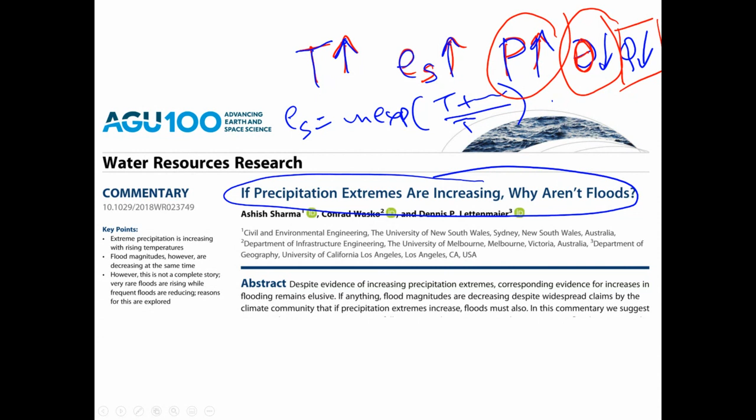At the end of the day, what we have found using actual data is that moderate floods, not the very extreme floods, but moderate flood events, are actually decreasing. While the more extreme floods, the ones that cause deaths, the ones that we use for our design applications in small urban catchments, are increasing. I'll show you how we arrive at this conclusion.

Okay, the logic is we use temperature. Temperature we know is increasing, so we make use of this assumption. Now what we do is we try to quantify the trend in any extreme, could be a flood. And the problem is that it is very unstable. This trend is almost impossible to quantify easily. So we use a trick.

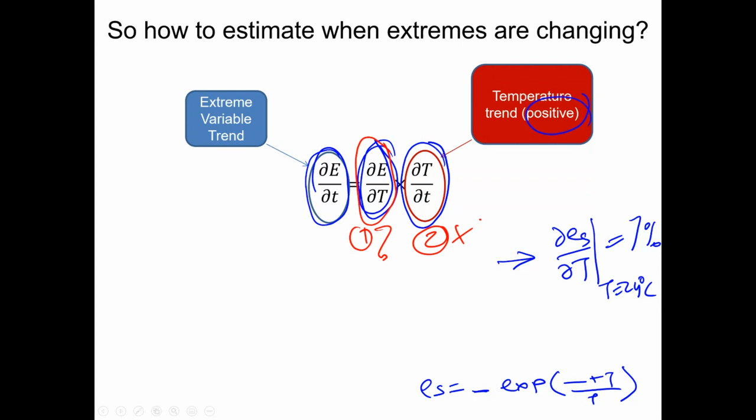The trick is that our trend can be expressed as a multiplication of two terms, term 1 and term 2. The second term is positive, and the first term we don't know. But because the second term is positive, all we have to do is estimate this first term. This first term is called the scaling, the Clausius-Clapeyron scaling, which equals 7% per degree centigrade for rainfall extremes and for saturated vapor pressure.

This is something you need to verify on your own, it's worthwhile doing. This is the reason why you have big rains around the equator and small rains around the poles, because the atmosphere cannot store that much moisture around the poles. Whereas around the equator, it can store a lot of moisture, so you can have really high intense rainfalls over there.

Coming back to floods, this particular paper used 5,000 catchments, and these catchments were all free of snow because snow is a messy animal. When temperatures increase, snow melts faster and it has complicated impacts on flooding. But this increase in flooding because of snow melt has got nothing to do with rainfall. We just wanted to focus on rainfall-driven flooding, so we excluded all snow melt originating floods and catchments.

We used 5,000 catchments and 50,000 rain gauges across the world. What did we do? We estimated these two guys, the scaling for precipitation extremes and for stream flow extremes. So what is an extreme over here? It's usually the top 6 precipitation events each year and the top 6 flow events each year. That's how we define these extremes.

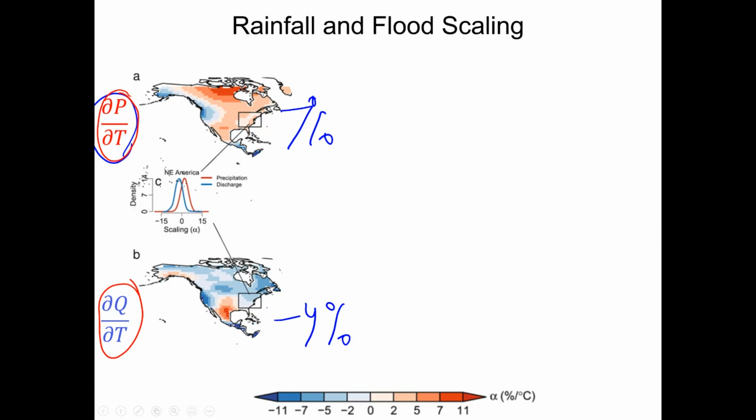Cutting a long story short, there is a general increase in precipitation and a decrease in stream flow. But remember, our events are not like a once in 100-year event, they are the 6 topmost events each year. But if you look at all of these events, lots of events, you look at what temperature was causing them, and you look at the rate of change of the precipitation extreme or the flow extreme with temperature, you find

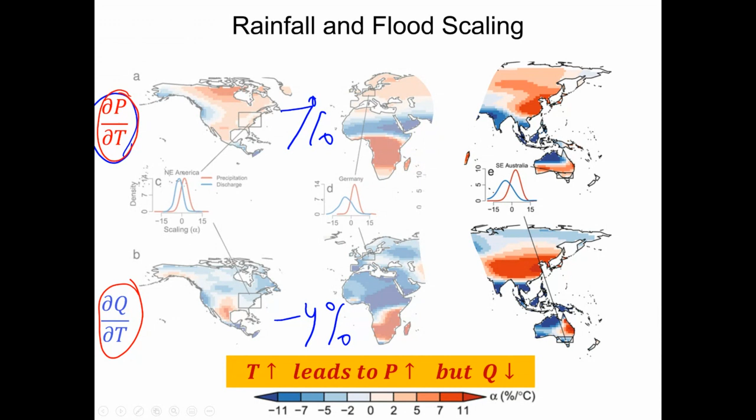this pattern that the precipitation is increasing roughly at CC, Clausius-Clapeyron, but that the floods are decreasing. Now, this is a pretty important observation, guys. You have to understand this is something that is quite scary, and I'll tell you why.

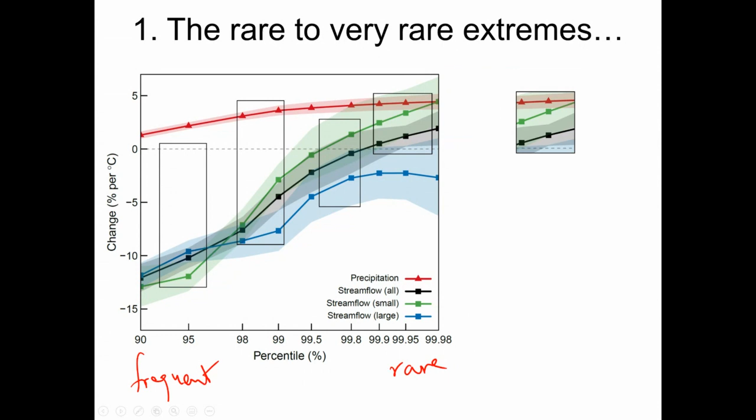If we consider only the extreme floods, remember this is rare and this is frequent. So if we consider the really extreme floods, what can be noted about them? Well, the first thing that can be noted is that the flow scaling is increasing and it is approaching the rainfall scaling of 7%.

And this is especially so for smaller catchments. Now remember, we are not considering urban catchments in this analysis, but smaller catchments behave very similar to urban catchments because in small catchments, it is the rain that creates the flood. In large catchments, the rain is important, but the flood is controlled also by the moisture in the catchment. So small catchments are very much like city catchments, where the rainfall will create a flood.

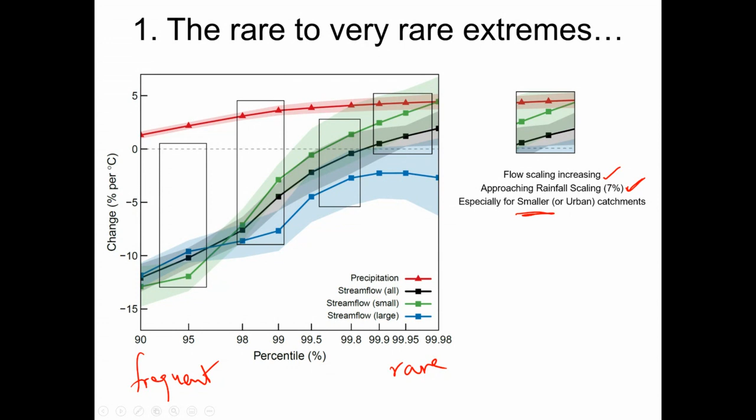Why? Well, the most obvious reason is that farming related practices are already very mechanized, and that will continue to happen. If you go to France or Israel or any developed countries with significant farming operations, it is two people in a family that control a farm having 10,000 cows. That might be acres and acres in terms of size. Everything is more and more mechanized already, and this will continue to happen. You would not need as many people in the countryside in course of time as we have now. So people will tend to congregate in cities where their infrastructure will be provided.

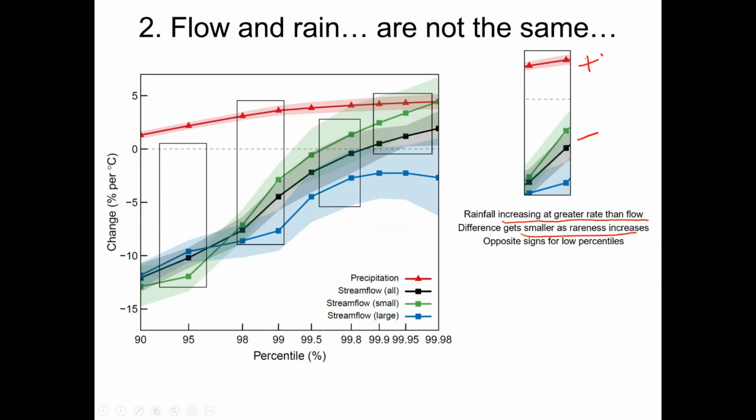So what it means is a larger rainfall peak will lead to a lower flood peak. Now these are fairly frequent events, the 98th, 99th percentile. So it's not very frequent. These are events that can cause damage in a flooding context. But what we are trying to say over here is that even if rainfall increases, you might not see an increase in the stream flow. So that is a problem because that is what we use as the basis of our flood estimation nowadays.

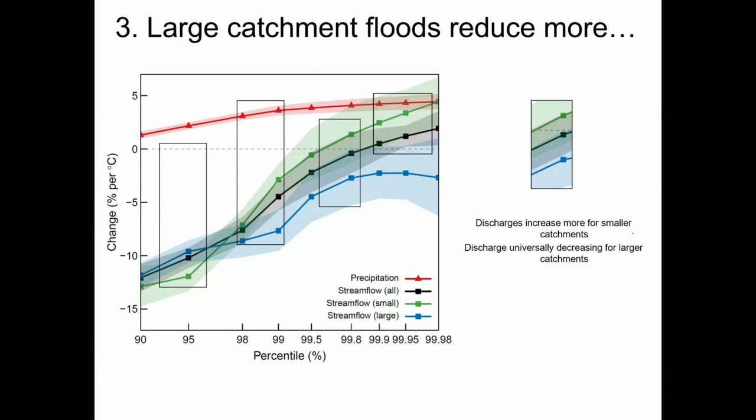The third point is fairly important. If you look at this box, you can note some very strong things. Discharges are increasing mostly for smaller catchments, and they are decreasing for the larger catchments. Now, remember, it's the same rain that is happening in small catchments and large catchments. So why are small catchments showing increased floods while large catchments are showing decreased floods? Well, the reason for that is actually quite simple.

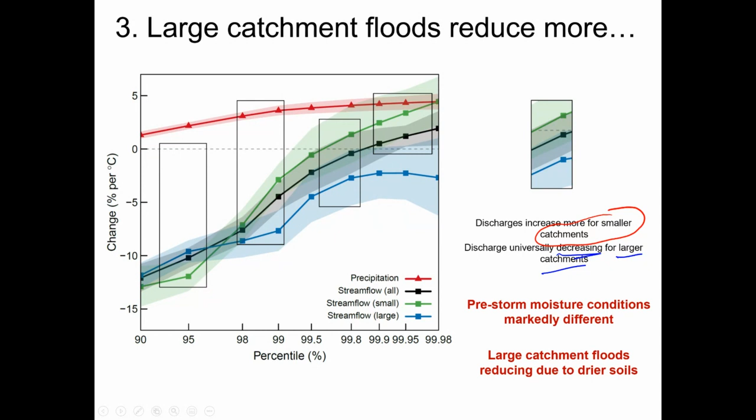Floods in small catchments are a function of rain because the catchments cannot store moisture. The volume of moisture they can store is fairly small. So the moment you have rain, that volume gets filled up and the catchment is wet. After that, any new rain basically means that it will just become flow. In a large catchment, that is not the case. The large catchments can store massive amounts of moisture. So once you have rainfall in a large catchment, because it can store such a significant amount of moisture, it takes time for that moisture to get full.

Now, unfortunately, the large catchments' moisture is now more empty because you're having greater evaporation. So the soils are getting drier faster than before. And as a result of that, the large catchments are usually showing smaller moisture. Hence, when the new rain comes along, that new rain first has to wet the soil and then it becomes a flow or a flood. As a result of that, for large catchments you are seeing a decrease, whereas for small catchments you're seeing an increase in the floods. And this is a fairly critical point.

Now, when do large catchments matter most? Large catchments matter most when it comes to water supply.

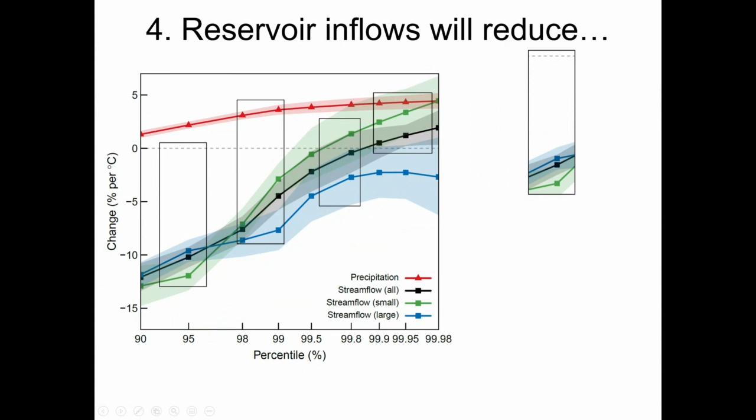Now, your reservoirs, which store the water we need in our cities to survive, can store a certain volume of water. Once you have a very extreme flood, what you do is open the spillway in the reservoir and let those floods out.

But what keeps a reservoir full every year is this frequent flood. You need a big flood in a year. If you have one reasonably big flood in a year, not a damage causing flood, just a reasonably big flood, that is enough to fill the dam, and that dam is now ready to supply water to the population for the next year. So this is fairly important. The frequent floods need to be coming because they are important for filling the dam.

The large floods are important for filling the dam, but their full volume cannot be stored. It will have to be let out, because if you try to store it, it might damage the spillway. And if the dam breaks, you have this massive volume of water going downstream. It'll kill a lot of people, have a lot of destruction. So you don't allow the dam to be full to the top with even bigger waters coming in to be stored. You just open the spillways and let them out downstream. What do you rely on? You rely on the moderate floods coming in and filling up the dam.

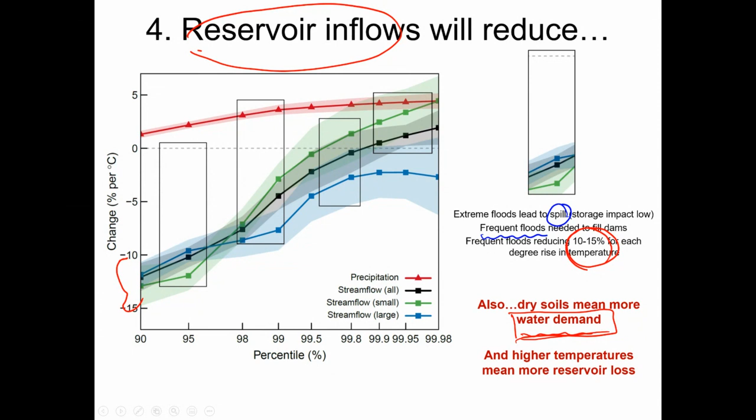Okay, now, a separate study from the United States using nearly 400 catchments said something very interesting. It calculated the annual maximum flood and the annual maximum rainfall.

And it figured out how many times the annual maximum rain creates an annual maximum flood. What is the probability of that? It found that in these 390 catchments, 36% of the time that rain will become the annual maximum flood. The remaining 64% of the time, it might be the second or third annual maximum rain, or some other rain, that creates the annual maximum flood.

Now, why is this important? The reason this is important is because this number changes to 62% when the catchments are wet, and it changes to 13% when the catchments are dry.

So this is all based on data, and this is annual maximum floods, not the top 6 floods or top 6 storms in the year that I used in that paper we showed before. So the annual maximum flood occurs from the annual maximum rain on average 36% of the time. This 36% becomes 62% if the annual maximum rain falls on a wet catchment, and it becomes 13% if it falls on a dry catchment.

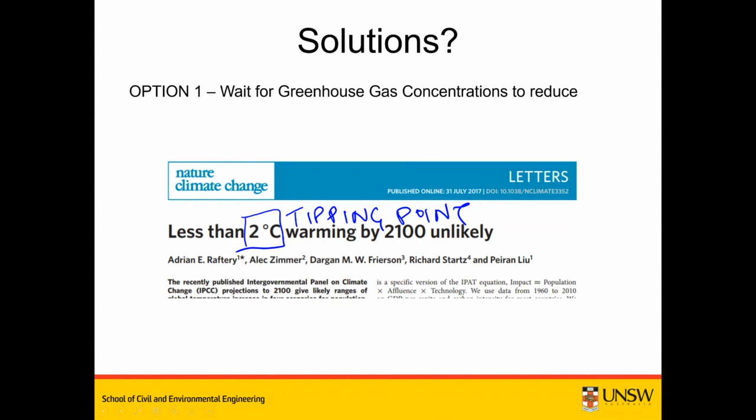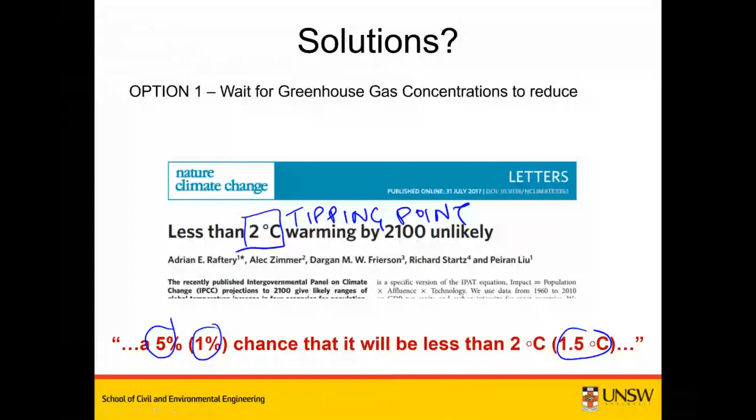The chances of containing warming below the tipping point is 5%. And the chances of keeping it below 1.5 degrees is 1%. So there's very little chance that you will be able to keep warming below the tipping point by the year 2100. Whatever you do, very little chance. So waiting for greenhouse gas concentrations to reduce is not really a wise option.

There is a second option, which is kind of what people are doing, although not officially. Each water authority is taking matters into its own hands and trying to act on this issue. So what are they doing? Well, they are looking at how they handled water insecurity before.

So in old times, when you have water insecurity like this, you have a drought. Well, what do you do? You build a dam. That is one solution that the world is looking at. Or you build a desalination plant - that's the second option. Or you try some diversion projects.

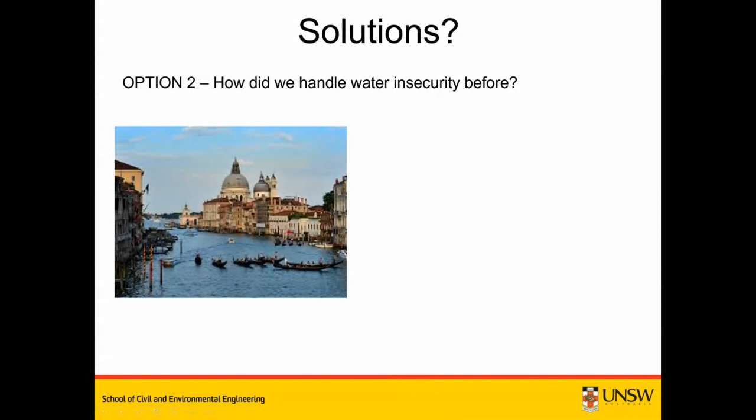Okay, the second type of water insecurity we have is flooding. This is a picture of Venice. Venice is getting flooded very often nowadays—water levels come up to this area. This is called St. Mark's Piazza, I think, and that's what you see here. But it's normally full of water, which was not the case before.

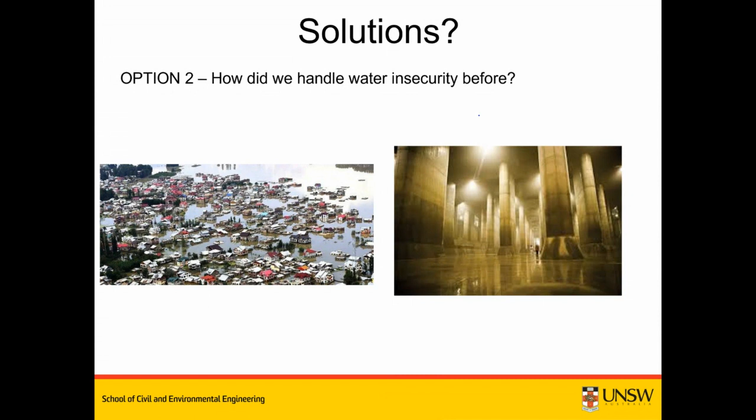One other example about flooding—another way of dealing with it is you store that flood water somehow. This example is actually from Tokyo. After the Second World War, Tokyo was rubble and they had to rebuild the entire city. But before the war, they noticed that every year Tokyo gets flooded because of tidal influx of water. So what did they do?

Under the city of Tokyo, you find these big, huge reservoirs. They fill up with water every time a big tidal influx comes in. Once the tide goes out and there's no danger, a pump switches on and transfers the water back into the river. This keeps on happening—Tokyo hasn't had floods in the last 20-30 years. Before 1945, floods used to occur every year in Tokyo.

The same type of underground reservoirs are also present mostly in very rich countries and rich cities—Zurich is an example, they have something like this. Many richer countries have invested in creating these massive underground vaults or reservoirs where water is stored, and after the reservoir fills or the flood has gone, you switch on the pump and release the water out. This is how people have addressed flooding—it's not possible everywhere, but in some places it is.

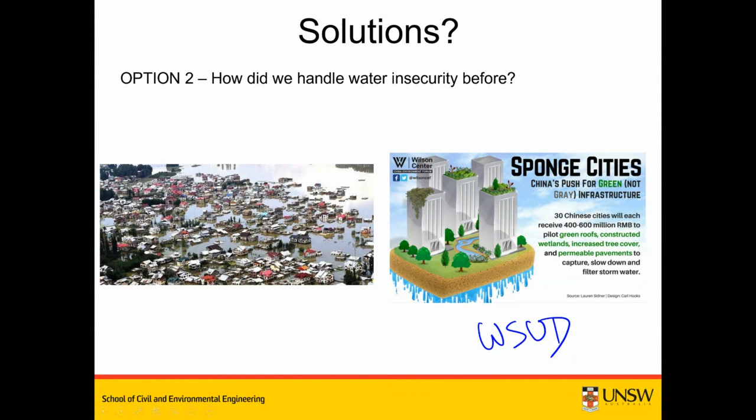So this is all part of water sensitive urban design, and this is one other option. This is not a fix to all of our flooding problems, but it is one possible thing that could be done. Now, I have a question from Danny who's asking, how do we transport this water?

So I think the transportation part, if we look at these reservoirs, or the dikes, or these diversion type structures, transportation is not by gravity - it is against gravity, and this is where the engineering challenge comes along. So you have to have some type of pumping so as to pull water up to a level from which it can go by gravity. That is how you transport the water. Pumping is needed - without pumping, you can't do it.

But the thing about the pumping is - I'll tell you another, related story. 50 years ago, our groundwater levels were pretty much the same year after year. Nowadays they have gone down by about 30 meters in the Indian subcontinent and in southern China.

Why have they gone down? There are two reasons. People need water, but they always needed water - the demand for water was always high. The second reason is very important: electricity is cheap, and electricity will get cheaper and cheaper as time goes by.

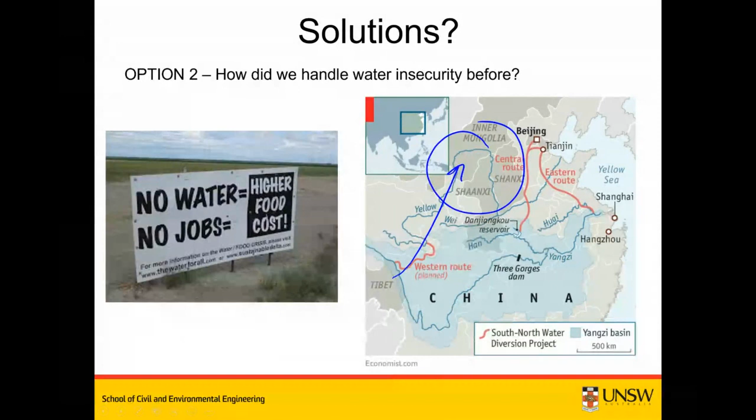So this is about water-sensitive urban design. I just have a general argument that, in addition to thinking about engineering options, it is also important to be honest about the risk, which is something we have not been till now.

Part of the reason we have not been honest is because of politics. You look at the type of information that comes from one side of the political spectrum, who will always say they don't believe in climate change, because if they start believing in it, they have to do something about it. And the doing part is what they are not comfortable about, because it involves reducing emissions. And reducing emissions means loss of jobs, changing of industries, etc. So basically their political base would not allow them to proceed down that path.

This is not just in Australia or America. In America it is very prominent and very clear, but it is literally the case everywhere in the world. Unfortunately, our political system is such that there are two sides in the political spectrum, and whenever you have two sides, they will take opposing views. One view is usually to deny that climate change occurs, and the other is to embrace that it occurs. I guess this division is too far for the common person in the middle to be convinced about the need for change, which is part of the problem.

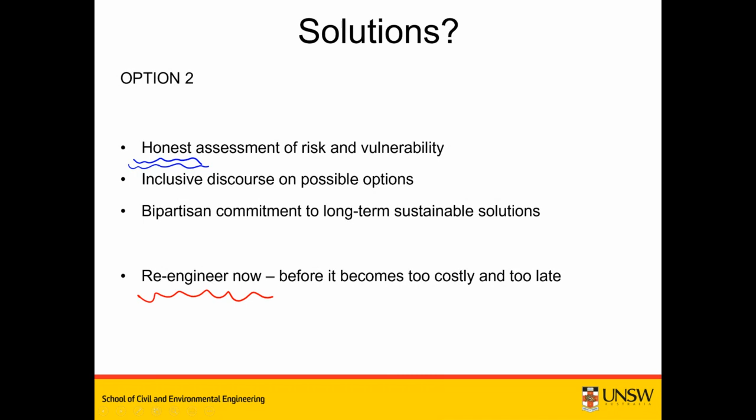Okay, so this was my presentation on the flooding stuff that I wanted to give you guys last week, but I couldn't complete.

If you have any questions on this, it might be good to jot them out now, because now we will get into the actual estimation of the design flood. The estimation of the design flood is a more engineering concept, where we will be looking at the design rainfall and how it gets converted to a design flood. So if you have any questions, think them through, put them in the chat, and I'll come back to it as we go ahead with this lecture.

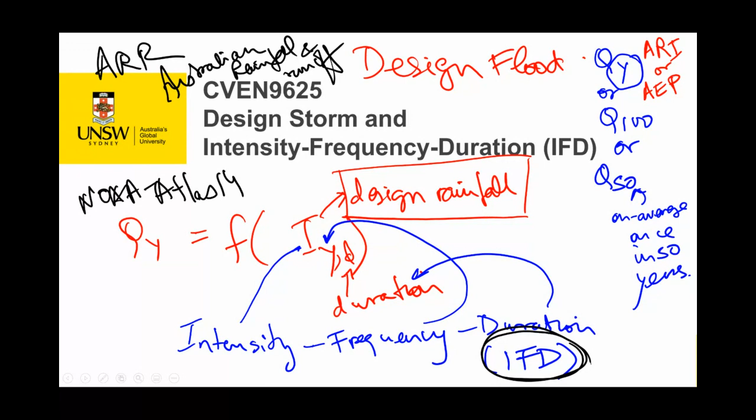We are actually having a paper come out in the next few months or so, and you'll probably hear about it, which is looking at recharge of the subsurface reservoirs across the world. Recharge is measured using a satellite called GRACE.

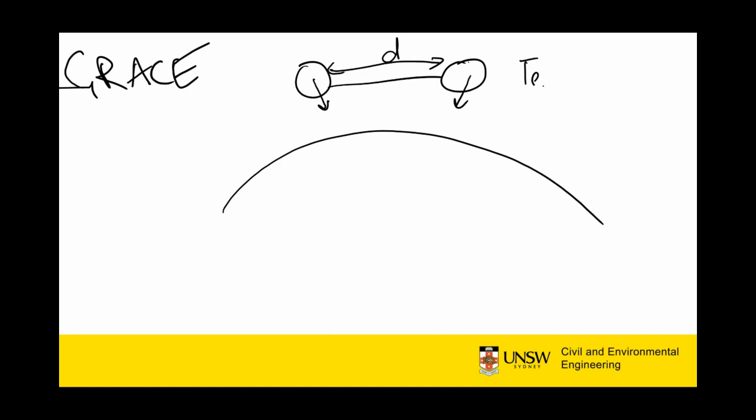This GRACE satellite is quite cool - it's actually two satellites at a certain distance that spin around above the Earth's surface. When they come above land, the gravitational pull is very different than when they come above water. So as a result, the distance between them contracts and expands depending on how much gravitational pull the Earth below exerts on them, and they are able to estimate something called the terrestrial water storage or recharge.

So essentially, there are much bigger issues than just the increase in floods or reduction in water supply that I've talked about. The issue of climate change has implications in ways that we don't really know till now. We are still guessing - only once it happens will we really understand and appreciate the extent of the damage that has been caused.

I mentioned that design flood estimation is Q_Y, okay? And this Y thing is called the ARI or AEP. ARI stands for the average recurrence interval, okay, example 100 years. AEP stands for the annual exceedance probability, okay.

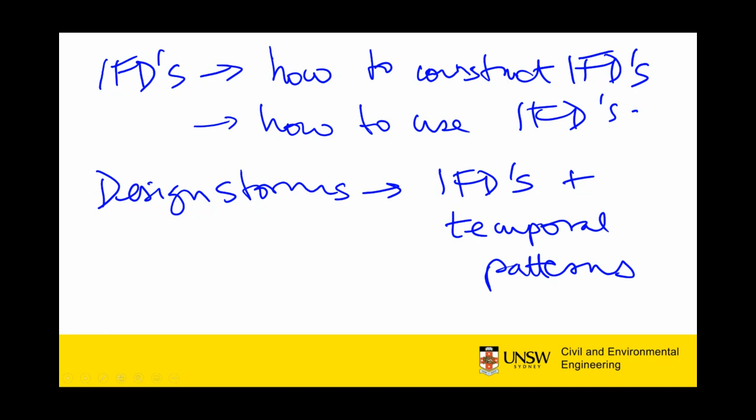But that design storm intensity is a constant for your duration. If your duration is, say, 10 hours, it'll be one constant value of rainfall for all 10 hours. That doesn't quite make sense - that's not how rainfall occurs. So a temporal pattern gives it a temporal structure. It changes the rainfall in the first hour, second hour, third hour, etc., all the way across to the 10 hours, such that the average intensity is the same as the design intensity for a 10-hour duration that you started off with. So these are the two things that we are covering in the remaining slides.

Okay, so these are developed by the Australian Bureau of Meteorology, and their most recent edition is ARR 2016. Remember, ARR stands for the Australian Rainfall and Runoff.

This Australian Rainfall and Runoff has basically been developed 4 times. This is the 4th edition of Australian Rainfall Runoff that we have. The first 3 editions were paper-based. There were lots of big maps and documents that had to be kept in all engineering consulting offices that would follow the procedures. Nowadays, it is actually available over the internet, and it's a very good document. It's a very well written and well designed document.

Because it has incorporated the best advice from academia, from government, and from the consulting industry. There are people from all branches of the profession that have contributed, and this is the first version that explicitly provides guidance about climate change impacts. I mean, this is the first national design guideline document anywhere in the world that provides guidance about climate change impacts, which is a really cool thing, which is a very politically scary thing to do, but still the document is brave enough to provide some type of advice about the climate change impacts.

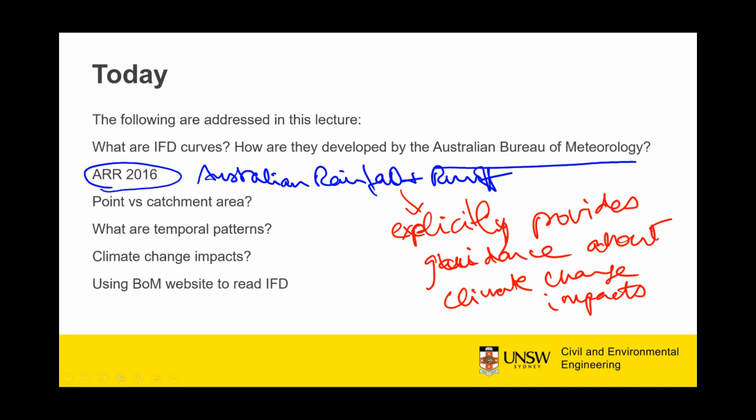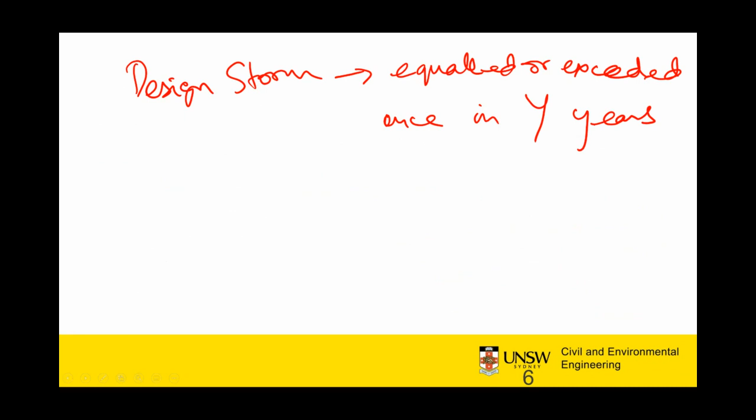Okay. So I've already mentioned what is a design storm. A design storm is basically something that is equaled or exceeded once in Y years. In the case of rainfall for a given duration D.

So it's not a real storm. This is something that is important to understand. It is not a real storm. It is a hypothetical storm, but that storm on average can be expected to be equal or exceeded once in Y years. And for the case of rainfall, the storm needs to be specified for a duration. For the case of floods, duration is unimportant - you're just looking at the biggest flood. But for the case of rainfall, the duration is important. So basically, a design storm is specific to a given duration as well as a given risk.

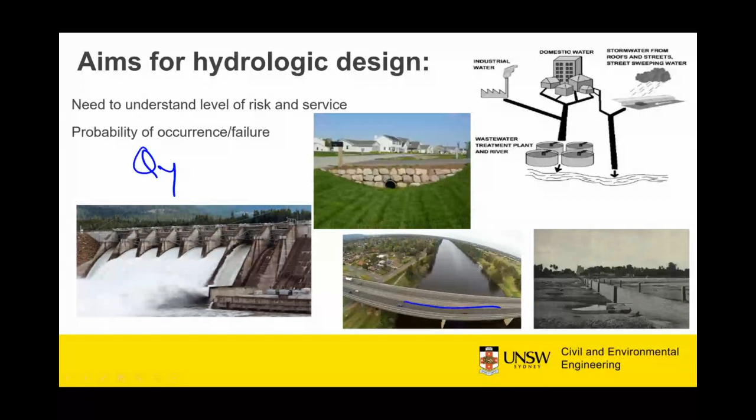So basically, using this design storm, we estimate QY, okay, which is our design flood. And this QY is the basis for finding out the height of this bridge, the size of these canals or solid structures, the length of the spillway, the carrying capacity of the spillway, and this is the most normal use, which is simply the pipe that is just releasing storm water into an open area. So stored storm water, if it has to be released into a floodway or a river or wherever you have to go, the size of this pipe is something that you would design based on design flood estimation.

What will happen if the pipe has a smaller diameter than it should have? Well, what will happen is you'll have flooding on this side. These houses will get flooded - you don't want that. So you have to have the pipe of the right diameter. Somebody might say, hey, why don't we just increase the pipe to twice the diameter? That is possible, but it can be very costly if especially your pipe has to run for significant lengths over that countryside. So basically finding the right pipe diameter that is not too costly, not creating excessive risk is important, and that is all coming from this design flood estimation procedure.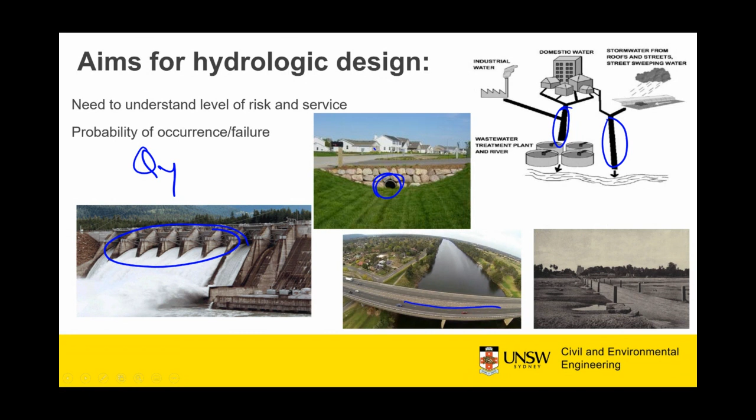This is how you understand the design flood estimation idea. This is a river you're seeing, with flood banks, and this is the normal width of the river. You will see some dry patches that are very wet, where the soil color is usually different. That will be the typical extent of a 2-year flood.

Vegetation will normally start growing after the 50-year flood line. This depends from place to place and on the type of vegetation as well, but typically, when you have a watermark until which there is no vegetation, that watermark will be less than 50 years. After 50 years, you'll start having permanent vegetation in that area.

So this is what we are talking about. We are saying that in certain cases, if you're putting a bridge across this particular point, that bridge needs to be anchored far enough such that it can withstand a 100-year flood. That is what we are trying to do. We are trying to estimate the 100-year flood so as to find the plinth level of the bridge, and how do we design its columns, etc., such that the bridge is not impacted by flooding.

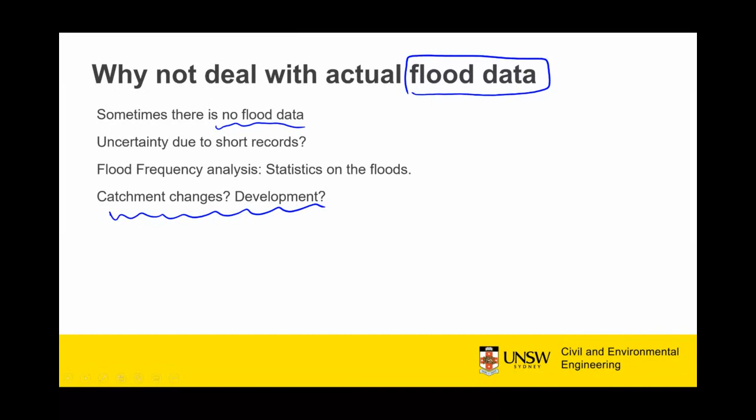Sometimes the catchment has changed or the climate has changed. Like in the case of Sydney - if you look at the oldest pictures of Sydney, looking up from the harbor towards what is now Central Station, you can search it up. You will come across a building called Cleveland House, which is on Cleveland Street, not too far from Central Station. This Cleveland House was the only building you could see in the really old pictures of Sydney. And this is bang next to Central Station. It is not even visible now - it is surrounded by skyscrapers all over the place.

So basically, urban development has changed everything. The design flood that should have been used to construct, say, the stormwater structures around Cleveland House are completely invalid now compared to what they were before. It's all because of urban development. This urban development is a part of life, and the second thing is climate change. We have just discussed that urban floods are likely to increase because of climate change. So essentially, flood data alone is not sufficient.

What do you do in such a case? You use rainfall, or IFDs. Luckily we have lots of rainfall data because flood data is a bit of a pain to measure. I mentioned in the lecture, last week or the week before, that measuring floods involves taking the cross section, cutting it into sections, estimating velocity, and then figuring out the overall discharge. It is not simple - it takes effort, it's costly. Rainfall is very easy to measure, so we normally use rainfall.

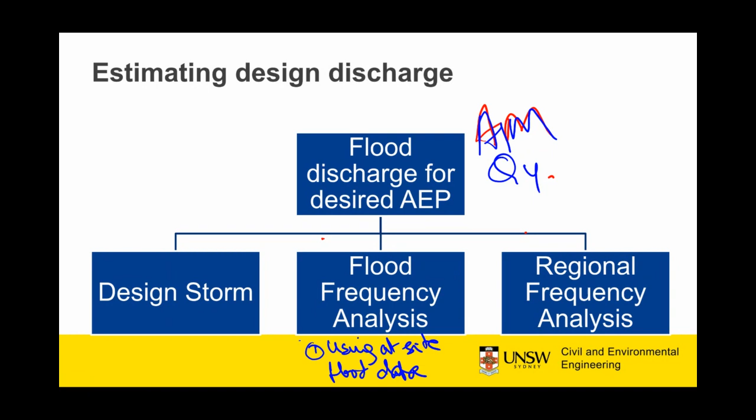So our aim is to estimate QY—that is our aim. QY can be estimated directly from flood data. So option 1: using at-site flood data, you use something called flood frequency analysis. That means you have a catchment—let me just make up a catchment. This is your river.

Okay, you're trying to build a parking lot over here. You need an estimate, and you have been measuring floods for some reason. If you have measurements, you would use flood frequency analysis - that is the ideal approach. If we have flood data, use flood data in most situations. Unfortunately, flood data is rarely available where you're trying to build your parking lot or a new city, so you often can't use it. You would like to use it, but it's very difficult.

So then the second option comes along: use flood data from nearby catchments. This is what regional flood frequency analysis is. Now, regional flood frequency analysis is not about blindly using flood data from anywhere in that region - you have to take into account the difference in catchment areas. You have to convert for the same catchment area, the same slope, the same intensities, etc. There is a bit of uncertainty involved in that whole process, and that is called RFFA. This one is called FFA, flood frequency analysis. So both of them are using flood data.

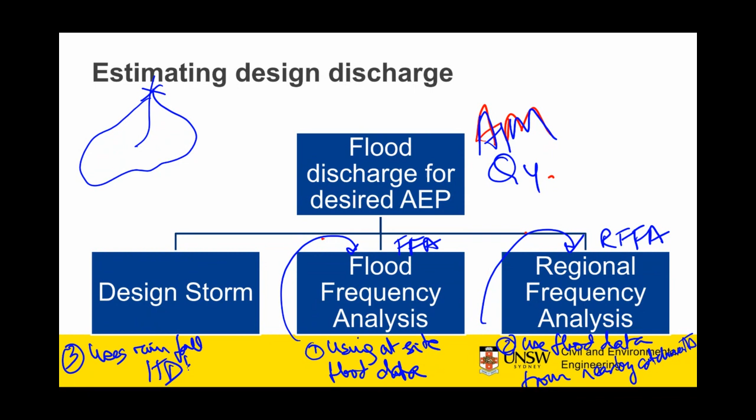Give me a second, guys. Okay, still working. Good.

So the third option is using rainfall IFDs plus a model. What is the model? It's a hydrologic model. So basically, you use a hydrologic model and a rainfall IFD to give you a design storm. That is typically what you would use in an urban setting, or in a place where you've had development, or where you have no flood data.

So Jonah has a question about clarifying what is the meaning of a 100-year flood. A 100-year flood means that the rainfall, say a 100-year rainfall, can be equaled or exceeded once in 100 years. That is what it means. It doesn't mean that the rainfall occurs once in 100 years - it can be equaled or exceeded once in 100 years. So basically, a 100-year rainfall is a very rare rainfall.

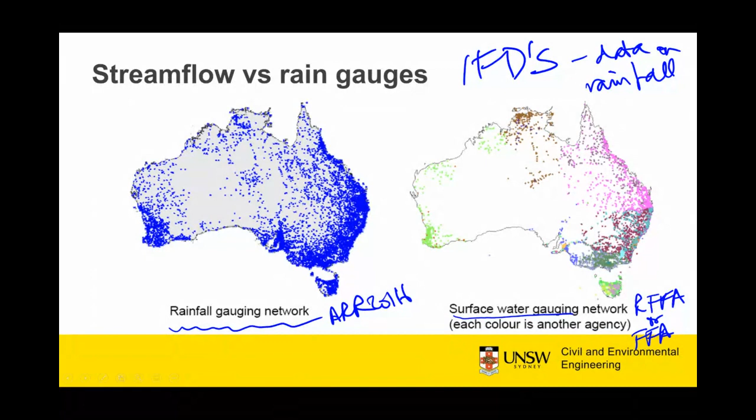Well, the data comes from our rain gauge network. This is the Australian gauging network that has been used in ARR 2016. And this is actually a streamflow network, which is being used in RFFA or flood frequency analysis. So this is what has formed the basis of our streamflow estimation, design flood estimation in Australia. And the rainfall information here is what is used for giving you the IFD relationships for each latitude, longitude in Australia.

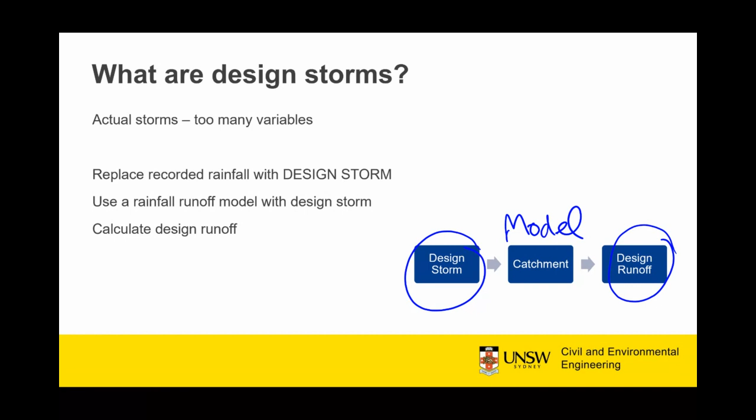So how do we go about doing it? Well, a design storm is what we have discussed - it's a hypothetical storm. You use this as the input into a model that represents your catchment, and then the output is called a design flood hydrograph. Okay, so if you think about it, it will increase to something like this, and then this value is your design flood.

What is the design storm? The design storm will be something like this, until a duration D - so this is a D duration design storm. This design storm is used as an input into a model and finally gives you a hydrograph. This hydrograph is a plot of flow versus time, and its peak value, its highest value, will be the corresponding design flood. So if this storm is your 100-year storm, then the peak value will be Q100 - that is the whole idea. Don't worry, I'll come back to this again. These are tricky concepts, and I understand they might be creating a little confusion.

So what is this design storm approach all about? Well, at the end of the day, we need QY - that's what we are after. We are after a design flood. So what do we do? We need to have our design storm.

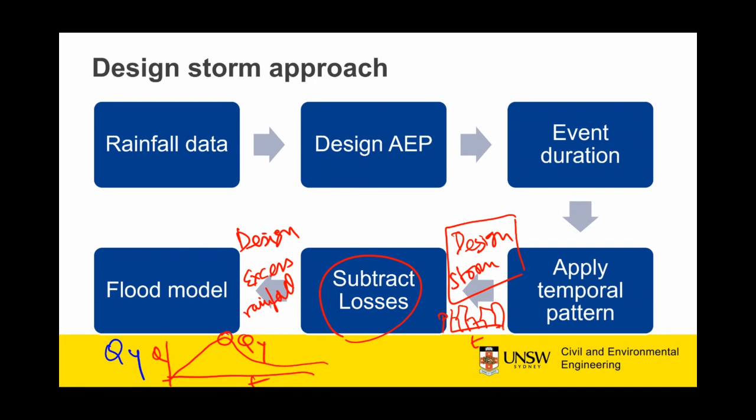That is the idea. Now, how do you get this design storm? And what does this design storm look like? Well, the design storm will look like this. It won't be a constant value. It will look like this with P on the y-axis and T over here. And the length of time over here will be D, which is your duration.

So how do we get to this level? Well, what we do is from our rainfall data, which is our IFD, we first decide the probability. Is it a 100-year flood? What is the Y over here?

Then we decide the duration D. Do we need a 10-hour duration storm or a 3-hour duration storm? And there is a very good basis for selecting the length of the storm, the duration of the storm. I'll come to that later.

So now, once you have all of this, then you have YID. That is how it is written. YID, which is the design intensity, which is I, intensity for an AEP or ARI of Y and a duration of D. So this value might be, say, 60 millimeters per hour. That is your design intensity.

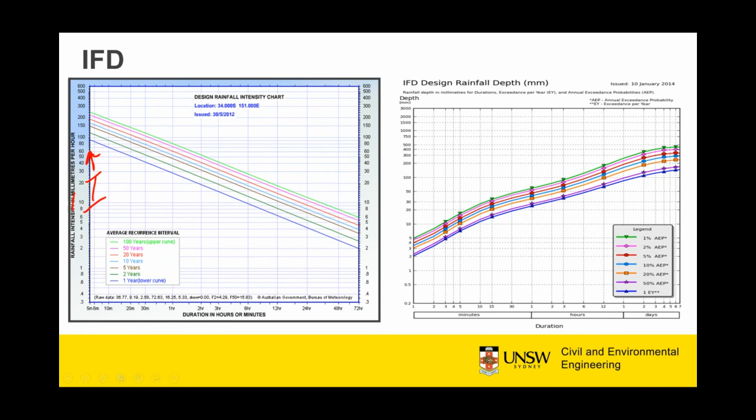So look at the y-axis. This y-axis is I. Yeah, difficult for me to write like this, but this is I, okay, this is going up. That's on the y-axis. What do we have on the x-axis? That's duration D. What do we have here?

These lines that you're having are Y or 1 upon Y. So when I say Y or 1 upon Y, I mean like 100-year storm, and 1 upon Y, 1 upon 100 is like a 1% AEP. These are two interchangeable terms. If you know one, you automatically know the other. So basically, you're having these different lines that designate whether it's a 100-year recurrence or a 1-year recurrence interval.

Okay, now suppose you're interested in intensity for, say, 12 hours. So you go up 12 hours. Now, you know your structure is a very risk-averse structure, and you need to design with a probability of failure of 1 in 50. So you basically look for a 50-year ARI, which is this guy. And then you stretch it across. That's your intensity. So this is essentially 50 I 12.

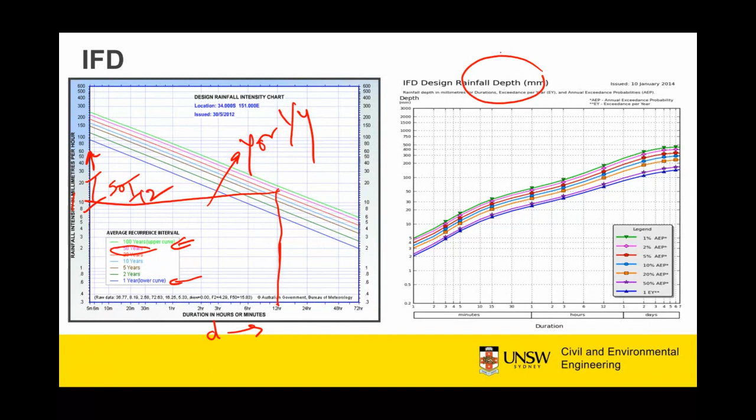The same plot can also be plotted in terms of depth. So this is millimeters per hour, and this one is just millimeters. What they have done is integrate the lines on the left-hand side to get the depth, because many times what people need is the depth. This is exactly the same two terms - the right-hand side is just an integral, converting the left-hand side plot into depth units.

Where do you get them? Well, you get them from a website, and I'll show you the website. I have it over here.

This is the website - look at the website address: bom.gov.au/water/design rainfalls, blah, blah, blah. This is giving you the 2016 design rainfalls from ARR.

In order to estimate them, you can estimate it for a single point by providing the latitude or longitude, or probably the easier thing to do is just look at a map. It's having some problem in terms of the map interface, but typically you can really specify on the map - you don't have to know the latitude and longitude.

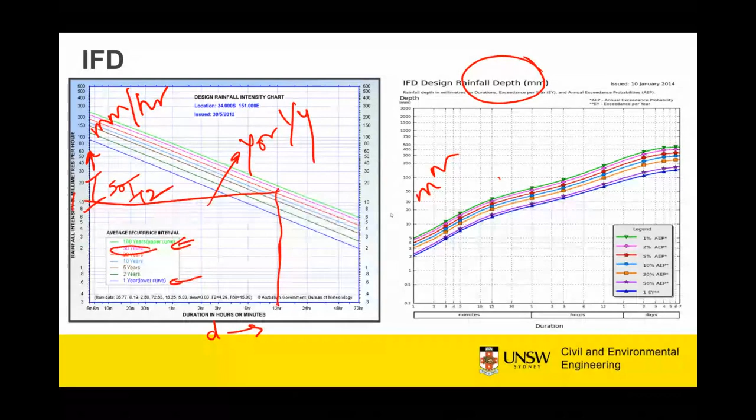So that is basically what your IFD system looks like, and that is what you have to use in your problems, because you'll be having a second assignment trying to estimate the floods, and you'll be having tutorial problems using this IFD website as the basis of estimating the flood values.

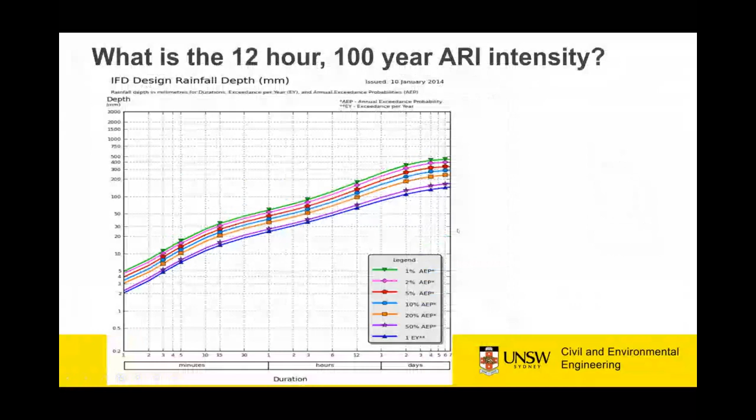I'm going to skip all of this - I've already told you what it is. I told you about these Australian Rainfall and Runoff documents that were developed before in paper terms, but the most recent version is available over the internet as a document, and this is a very powerful document. It has a lot of good guidelines as to how you should estimate a design flood in different situations.

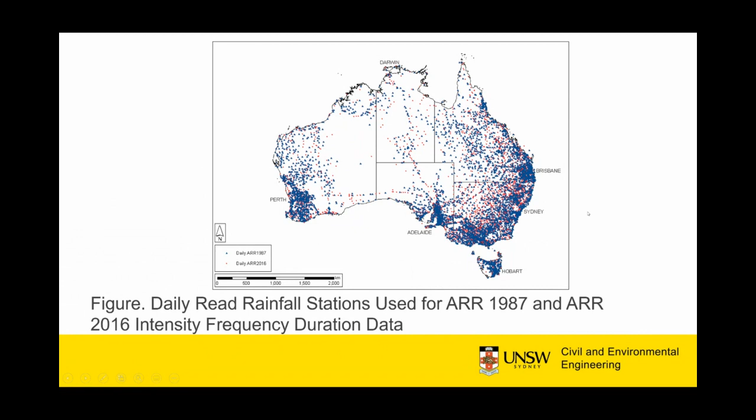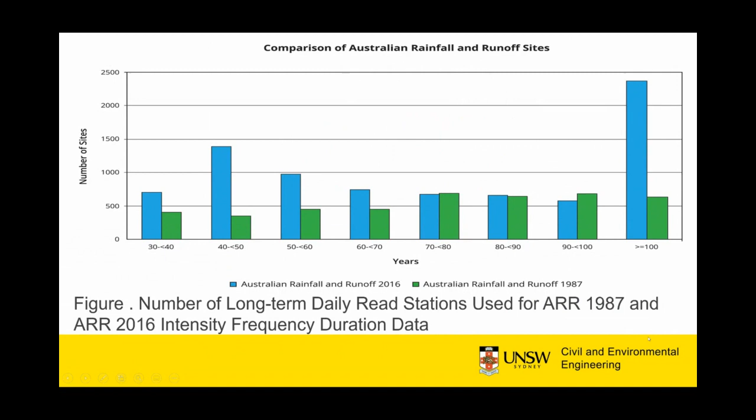If we skip the history, what has been used to estimate the IFDs is this information - the network of rain gauge stations. These rain gauge stations were used before in the previous version of ARR, but nowadays we have increased it very significantly. The number of long-term stations has increased fairly significantly for the case of the 2016 ARR, and the more data you have, the better way of being able to estimate the IFD.

Now, I've told you where to get the IFD information from. I think what is more important is to understand, especially in a graduate course, how these IFDs are specified in the first place. So basically, if you take a time series - in this case it could be the rainfall time series with time - these could be the time series, measured at a single gauge.

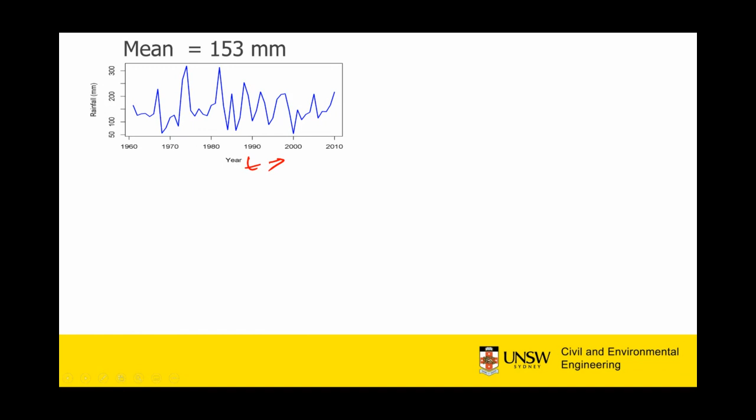The idea is that you can just take the annual maximum values of this time series. Once you take these annual maximum values and express them in probability terms, the highest value is the one with the lowest probability of being exceeded, while the lowest value is the most likely. Then you have a relationship of the annual maximum rainfall against probability.

What you can then do is fit a probability model, and then from this probability model you will be estimating some parameters. Finally, you can use the model to extrapolate or interpolate.

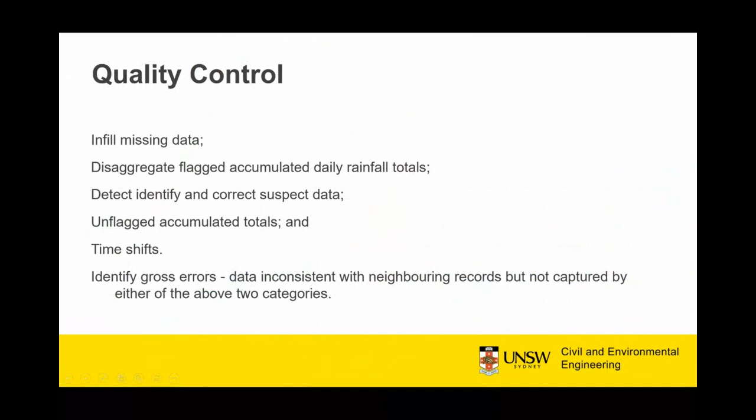So how do we estimate this probability model? We have certain procedures for estimating design rainfalls up to infrequent events, which are dealt with through the IFD curves.

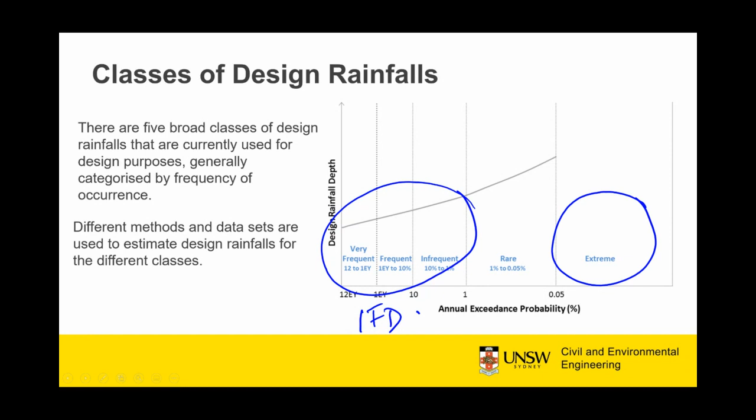When you look at really extreme events, like those needed to design a flood spillway, you look at something called Probable Maximum Precipitation, or PMP procedure. There's a different design procedure for the most common IFD problems we're interested in - these are typically for urban stormwater modeling. For urban stormwater problems, we use the Bureau IFD procedure. But for very infrequent, rare, and extreme events, a separate procedure is used called the Probable Maximum Precipitation procedure, which I will discuss later.

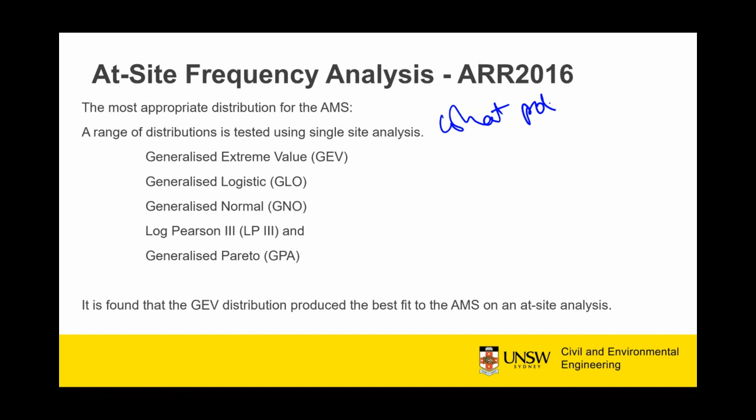So what probability model do we use? There are certain probability models that have been developed by hydrologists across the world. The one used in Australia is called the Generalized Extreme Value, or GEV probability model. I won't get into details, but for practical purposes, this is a probability distribution.

This probability distribution has been mathematically derived because it is very well suited to characterize maximum events - maximum events because we are looking at the annual maximum rainfall, or the annual maximum flood. Your flood is a regular random variable, but when you consider the highest of these floods, that is a different type of random variable that is better characterized by a GEV distribution.

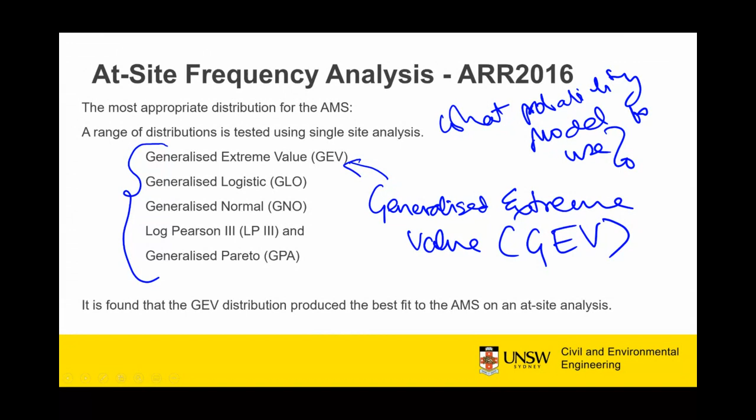You would have used probability distributions like the normal or Gaussian distribution for constructing confidence limits or performing hypothesis tests in regression modeling - that's used for normal, regular type variables. When you're looking at an extreme variable, a maximum of a lot of variables, special distributions are used. In Australia, they use the GEV model as the basis for fitting flood and intensity-frequency-duration probability models. I will discuss this later, but flood frequency analysis requires estimating parameters.

Okay, so these parameters of the probability models can be estimated in a number of different ways. The most common way adopted nowadays, especially for flood frequency analysis, is to use something called the L-moment approach. I won't get into details, but this is a way of estimating parameters.

So basically, estimating parameters is like trying a bunch of different parameters out and seeing what the fitted flood frequency curve looks like. If I use really bad parameters, my flood curve might be over here - I know this is a bad curve. Or my flood curve might be over here - I know this is bad because my actual data is sitting over here. So you keep iterating different parameter values until you get a very good line of best fit.

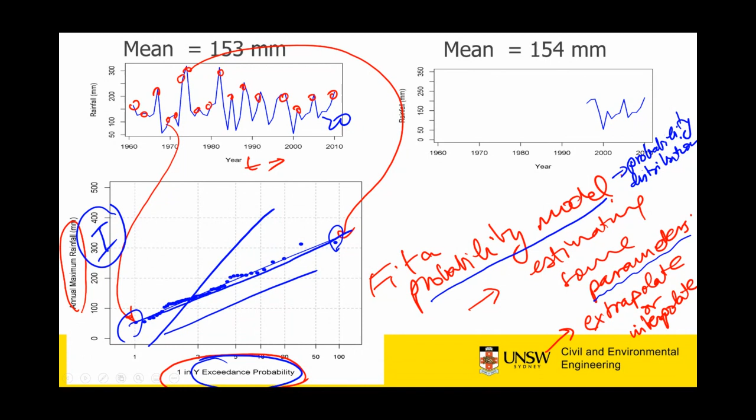The method used for that, especially for floods, is called L-moment analysis. I will skip the ARR87 procedure because that is out of date now, and we are now using ARR2016. This is only here for reference - you can have a look at your notes and PowerPoints. In ARR87, the probability distribution was different - it was a log normal or log Pearson type 3 distribution. Now we are using a GEV distribution, so I'll skip the stuff on ARR87.

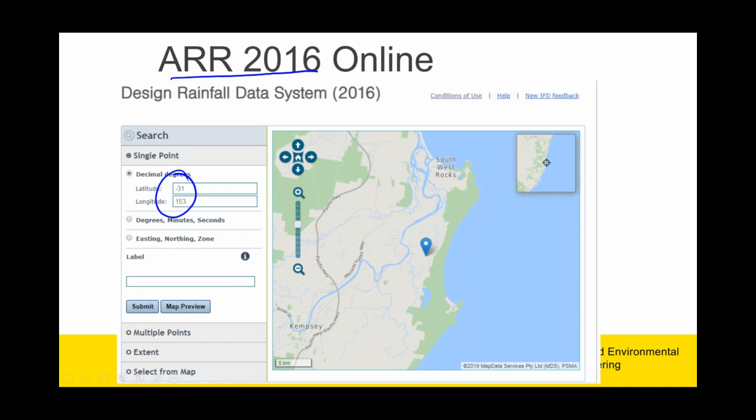But for ARR2016, I showed you the website, and essentially what you have to do is - if I had my browser set up properly, you would have seen a map over here. From the map, you can either click at a point or specify its latitude and longitude. When you do this, you get as an output either a table, which is duration running down, AEP running across, and units of millimeters meaning depth - design rainfall depth. So this is basically the output that comes from the system.

If you are interested in very frequent rainfalls, you tick a button over here, and then you're having sub-1 year ARI rainfall. So what is this? This is 12 events per year, 1 event per year, 4 events per year. This type of information, 12 events per year, might be needed to design, say, a rainwater tank or a roof drainage structure - not for a flood event, but for a small rainwater tank or roof drainage structure.

That is now becoming increasingly part of our livelihood. Remember your evaporation calculations that we discussed last week - we were talking about the frequency of irrigation. So maybe that frequency of irrigation is linked to these type of estimates. You can gauge what is the typical weekly highest intensity you might have in, say, an irrigation system, and that might allow you to set up your crop planting patterns, etc.

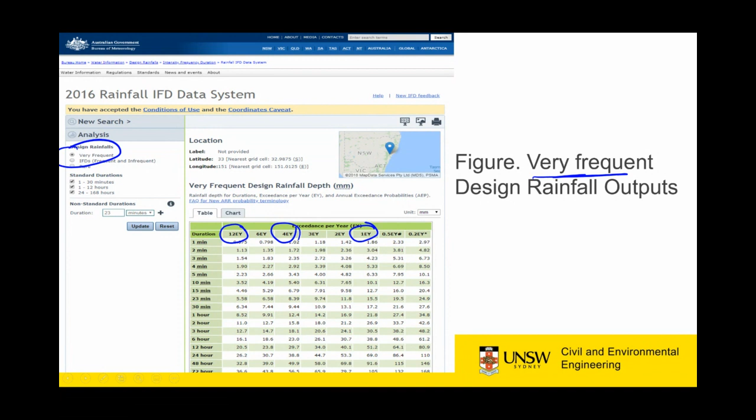Now, this last option you have is when you click on the rare design rainfalls, and these rare design rainfalls allow you to extrapolate. So typically IFD will be up till here, 1 in 100. But if you want to go to the rare design rainfalls, it allows you to extrapolate up to 1 in 2000 rainfall, 1 in 2000 year rainfall, which is still not your probable maximum precipitation.

Then beyond it, you will have very rare to extreme rain, which is what PMPs are all about.

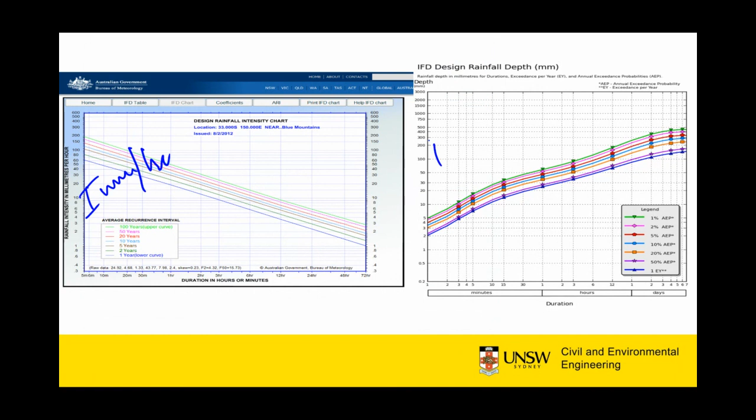What do you get? You get either a table or a chart. This is an example of a chart - this is typically what you would have. So this is your intensity in millimeters per hour, and this is your depth in millimeters. So basically the same information, but presented in two different forms. The main thing to remember is if it is given to you, you need to know the duration you're interested in and which curve you want to go for, and then you're able to estimate the corresponding design intensity.

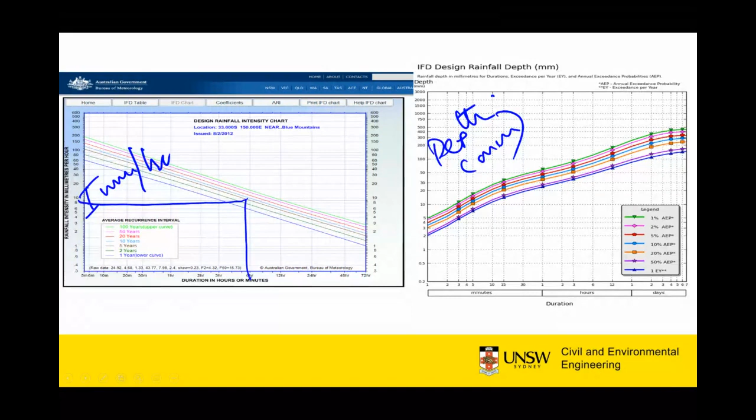So this is just showing you an illustration of the website that I showed you before. In this website, there have been a lot of changes made beyond what was available in ARR87. But again, this is not really relevant for you because you're just using ARR2016, so I'll skip this part. I'll also skip this part because this is how the IFD parameters and curves have been developed in the first place.

But essentially, once you use these intensities, you are in a position to estimate your design storm for any latitude, longitude in Australia. So this is the IFD information that we use to estimate our design storm.

Now, I understand I've covered a lot of ground, but I'll just try to recap. Yep, I have a question over here - good, how is the duration chosen? I'll come to that in just a minute, but I'll just recap this entire thing. We are after a design storm - okay, that's what we want. What should the storm look like? It should look like this: P versus time.

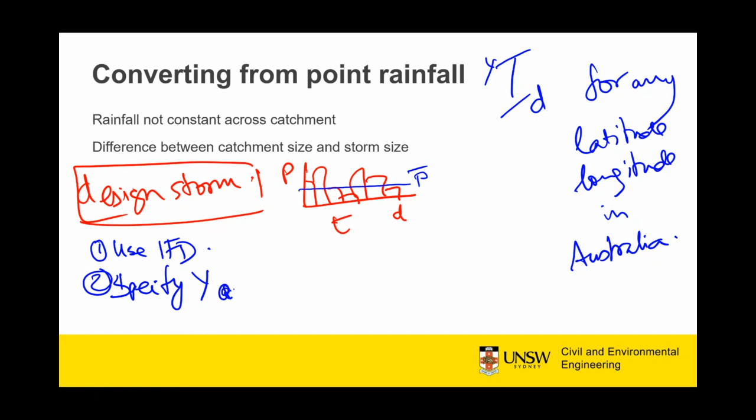Now, what we do in order to get here is: step one, use IFD. Step two, specify Y and D. And step three, estimate YID. Then P bar is essentially equivalent to YID in units of mm per hour.

So once you have this, you can estimate the depth, which is equal to YID multiplied by D, giving the total depth of rainfall in millimeters. And then finally you get the temporal pattern, and this temporal pattern is what makes it look like this.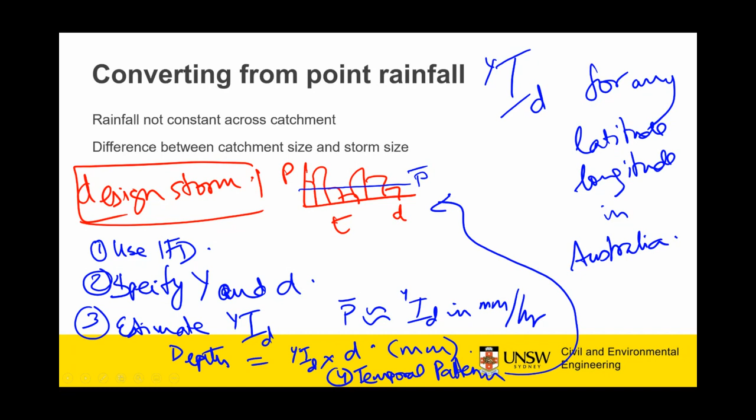So if this makes sense, let me take a question: which Y to use?

This Y, which is the ARI or AEP, will be given by the council or guidelines. So the Y you have here, the recurrence interval, is specified to you by the council or by road design guidelines, rooftop design guidelines, or some type of guidelines.

And what are these guidelines trying to do? They are trying to balance the risk associated with the structure you're designing. If you're designing a dam spillway, you can't allow the dam to fail, because if the dam fails, in the case of Sydney, you stand to potentially kill 500,000 people. So you cannot design a structure that allows for this type of failure.

So you will have design guidelines by a body called ANCOLD, the Australian National Committee on Large Dams. ANCOLD will say that for Warragamba Dam, use Y equal to 10,000 years. Council might say for a little stormwater drain, use Y equal to 5 years or 2 years, depending on specifications. That comes from the council or from guidelines.

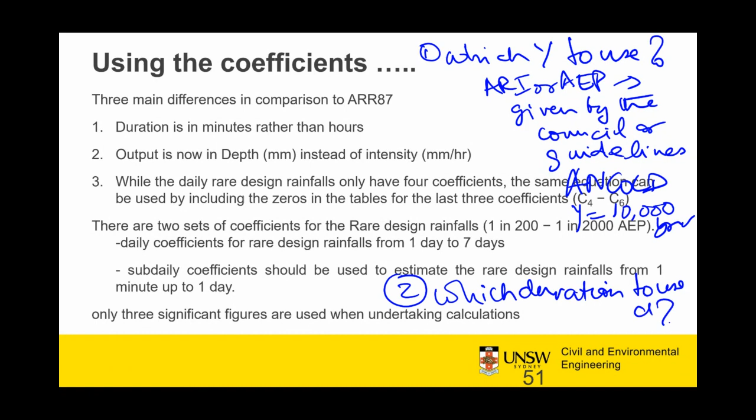This duration is a function of catchment size. If you have a small catchment, you just need rainfall for, in some cases, just 10 minutes for a flood to happen.

Unfortunately, we are in lockdown, so many of you might not have been to UNSW. But some of you who have been there would know there's an upper part of UNSW towards the coastline, adjoining Botany Street, and a lower part adjoining Anzac Parade.

If it has been raining for 7 minutes at UNSW, you will see the stormwater drain on Anzac Parade flood. This is typically what happens because the catchment area for UNSW is barely 1.5 to 2 square kilometers. You just need 7 minutes of rain for there to be so much water that the pipes at the bottom of the catchment cannot contain it all, and they will tend to spill, with water coming onto the footpaths and the road.

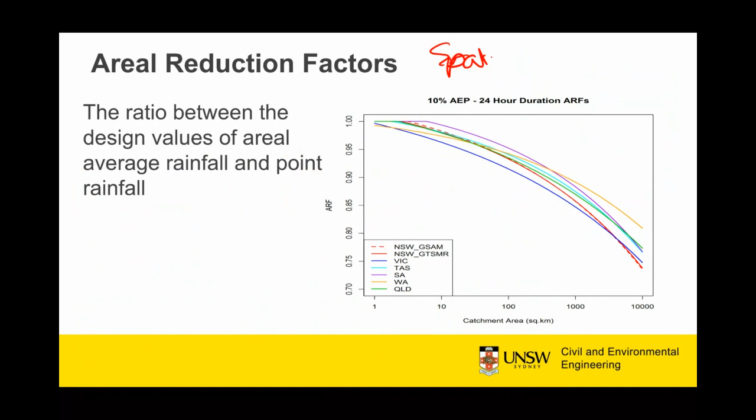And basically, to account for spatial variations, you create what is known as areal reduction factors, or ARFs. So when do you use an ARF?

An ARF is essentially a factor that says the rainfall that falls at one point in a catchment will be higher than the rainfall averaged over the entire catchment. Why? Because some points will have very high rainfall, some points will have very low rainfall. When you average the whole thing out, the extreme rainfall across the whole catchment is likely to be lesser than the extreme rainfalls at individual points. So when you look at what the rainfall should be as an average across the catchment, you need to multiply with an ARF.

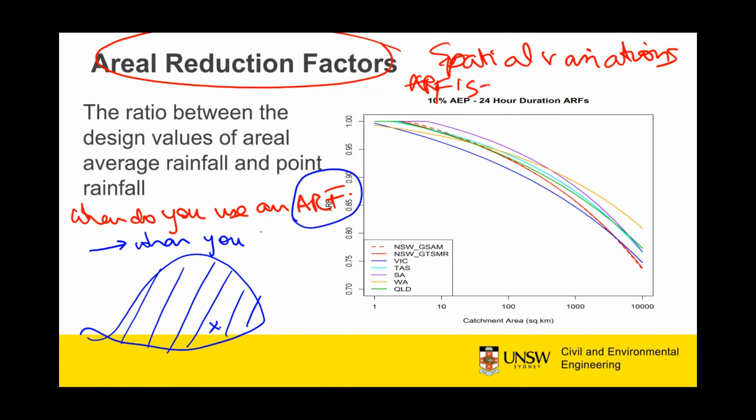So you need an ARF when you need design rainfall across an entire catchment. This ARF is very close to 1, not very different, so don't be worried about it. But for very big catchments, like 1,000 or 10,000 square kilometers, its value can be reduced by as much as 30%. In typical urban settings where you're doing urban stormwater design, you would not have catchment areas more than 1 square kilometer, so most of the time the ARF will be exactly 1.

But suppose you have to estimate the design rainfall over, say, the Warragamba Dam or the Hume Dam, or some big dam with a big catchment area - Warragamba Dam's catchment area is 10,000 square kilometers. You can't just use the IFD curve for the spillway to estimate the design rainfall directly. You take that IFD curve, get the intensity, then multiply it with this factor, which will be about 0.7, 0.75, 0.8, whatever it is. That becomes the average rainfall that goes into your rainfall runoff model, which you then use to estimate the design flood.

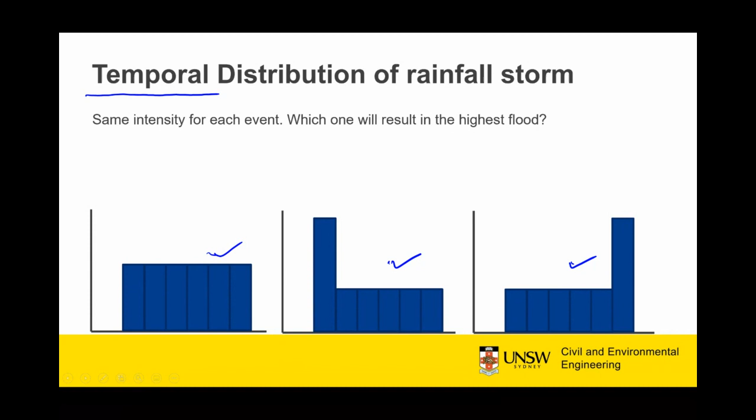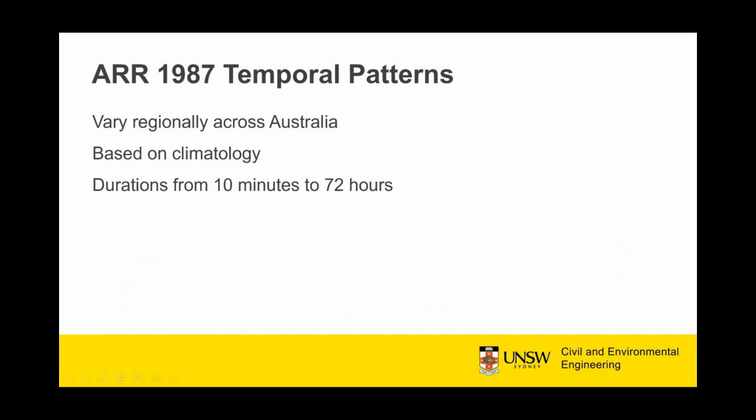So what temporal patterns should you be using? Well, just as you use the annual maximum rain to estimate your IFD relationships, the same way you figure out the time variations of those annual maximum rains, and based on those time variations you form the design temporal pattern. I'm skipping the ARR87 stuff, that's not important here. For 2016, you would have different temporal patterns for different areas, and essentially what you have is an ensemble of temporal patterns.

Okay, so typically 10 of them. So in this case, you have a duration of say 12 hours. And for these 12 hours, you are having one temporal pattern over here, another one over here. All of them add up to 100% because all you are having is a percentage of the total rainfall depth for each hour being specified on this temporal pattern.

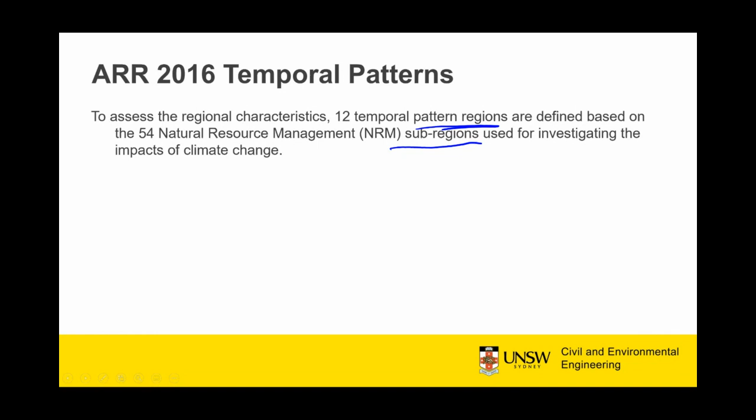So these temporal patterns are available across 12 regions in Australia, and multiple sub-regions in Australia. But essentially, at the end of the day, if you look at ARR for your latitude, longitude, you would have a link to get 10 temporal patterns for your duration.

And once you have these 10 temporal patterns, you can create 10 design storms. You don't have one design storm, you're having 10 design storms because you can have 10 different temporal patterns. Once you have these 10 design storms, you can have 10 flood hydrographs, and then 10 estimates of QY. So you have 10 different answers for the design flood, and your final estimate is an average of these.

Now, I have covered a lot of information. I'll try to recap it, and I know that you're confused, so bear with me. What are we trying to do? We're trying to estimate the design flood. The design flood occurs, say, once in 100 years.

We don't have flood data. So what do we have? We have rainfall data. From this rainfall data, somebody has cooked up these IFDs, which are sitting on this website. So this website is where you go, you specify the latitude, longitude of this location, and then you get the intensity, frequency, duration diagram.

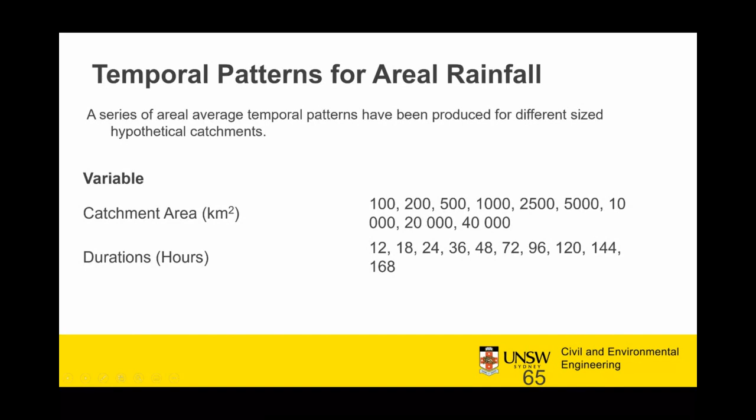Now I am going to skip stuff except the example. This is your catchment, in the Northern Territory, and you are interested in trying to estimate a 1% flood. The rainfall runoff model is called a RORB model - you don't have to worry about what that is, it's one of many rainfall runoff models that I used. The area of this catchment is 72 kilometers square. For this area, there are some guidelines I have not discussed till now, but they give some indication that your duration should be roughly between 60 minutes to 1 day.

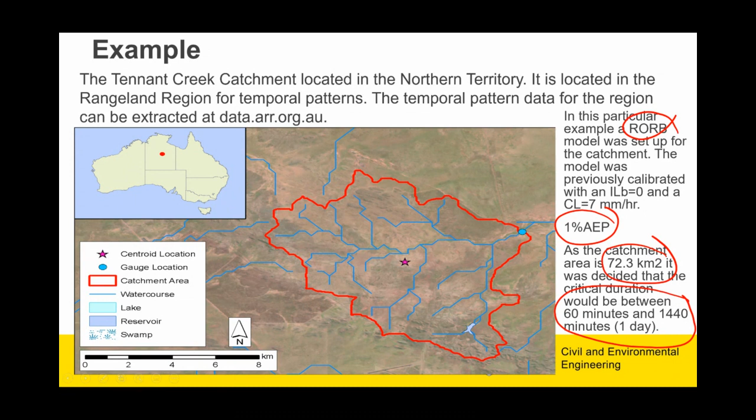Now, if you know this is your duration, what do you do? You estimate your intensity for a duration of 60 minutes, 120 minutes, 180 minutes, all the way down to 1 day. So you form a lot of design storms because you don't know what the perfect duration should be. For each of these cases, you have 10 patterns. Luckily, our catchment is 72 square kilometers, so ARFs are not so critical. And you then estimate the corresponding design flood - this is what we end up getting.

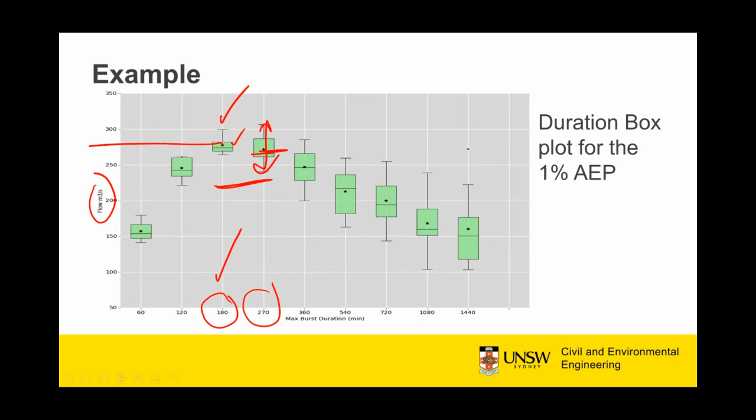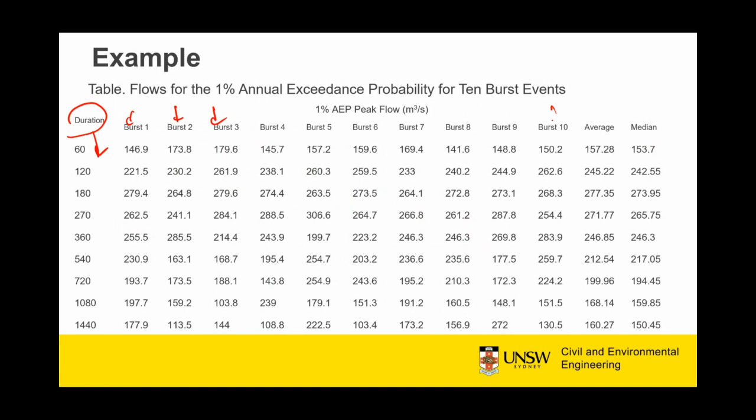Now, this is what happens. These are the different temporal patterns, and from the temporal patterns we are getting different storms. These are the durations you're having, and these are temporal patterns. We're getting 10 temporal patterns, and from these 10 temporal patterns we are able to create inputs into the flood model, which then gives us our corresponding design flood estimate.

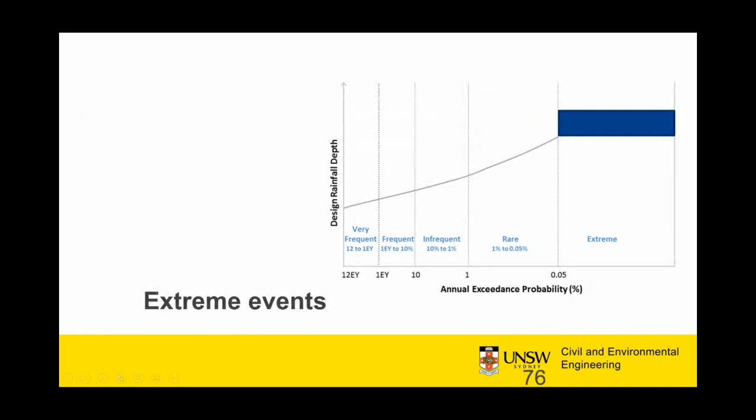Skip that. The rare design rainfalls, where you are getting to 1% and even more rare type of flood events, are needed typically for spillways. What we need to do for the very rare rainfall events is use procedures for estimating the PMPs, the probable maximum precipitations. These, when converted to floods, give you what are known as PMFs, probable maximum floods. These probable maximum floods are the basis for designing the spillway capacity of all our major dams.

For instance, the Three Gorges Dam spillway would have been designed based on a PMP routed through a flood model, estimated into a flood hydrograph whose biggest value would be the PMF. So that is how you design for very extreme events. Very extreme events are not once in a lifetime, they are once in 10,000 to 100,000 years. So they are very, very rare events, and they are only used for really critical or really dangerous structures.

One of the biggest problems the world is right now facing is whether climate change might be increasing our PMPs, because if climate change is increasing PMPs, then all the dams across the world are unsafe. That is a project we are working on right now. I have a couple of students doing PhDs in this general area, because the increase in moisture holding capacity, which causes design rainfalls to increase, should theoretically apply to PMPs also. And that whole thing about soils getting dry does not apply for PMFs, because we are talking of a once in 10,000 year event. If you're looking at such an extreme event, the soils are completely saturated, you can't assume them to be dry. It creates a bit of a problem.